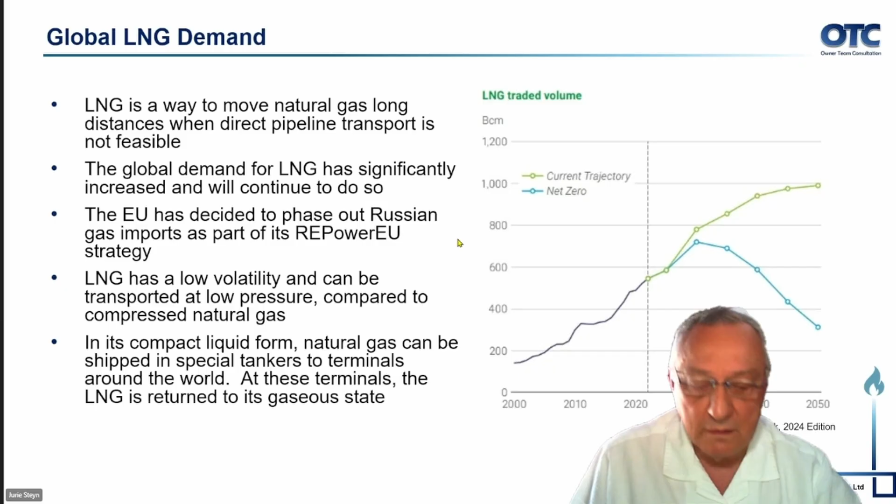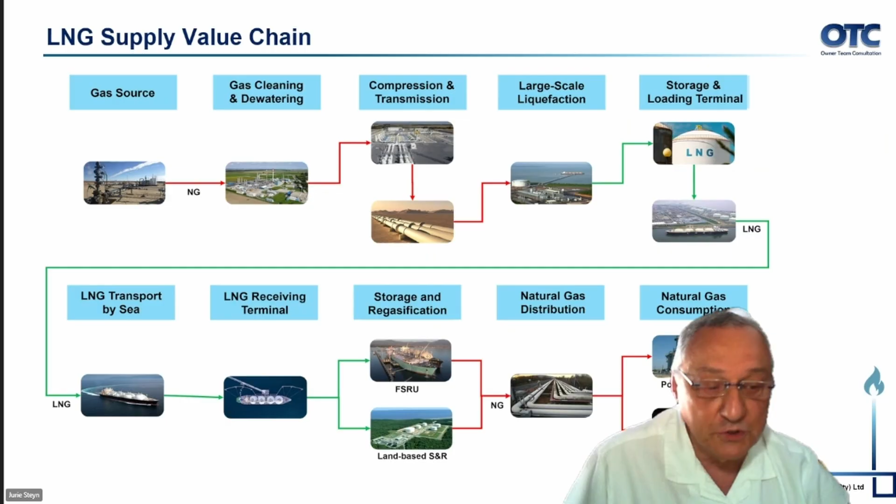What we're going to focus on today is this little section of the network. If I enlarge it somewhat, I'm going to be focusing on the receiving terminal part and the storage and regasification side. The next speaker, Freek van Heerden, will talk more about the distribution side of it.

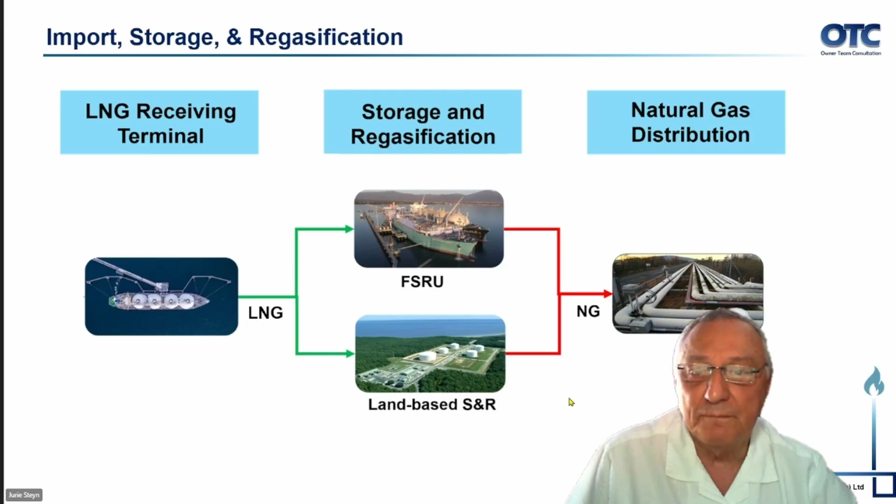If we look at the port and marine infrastructure required, obviously you need deep water berths. You need to be able to accommodate these LNG carriers. Typical capacity is 125,000 to 174,000 cubic meters. There's an example of such a carrier vessel shown from the top.

You need mooring and unloading facilities. This includes things like cryogenic arms or flexible hoses for LNG transfer. And of course, dredging and navigation aids — you have to ensure that large LNG vessels can get into your ports and be able to maneuver safely.

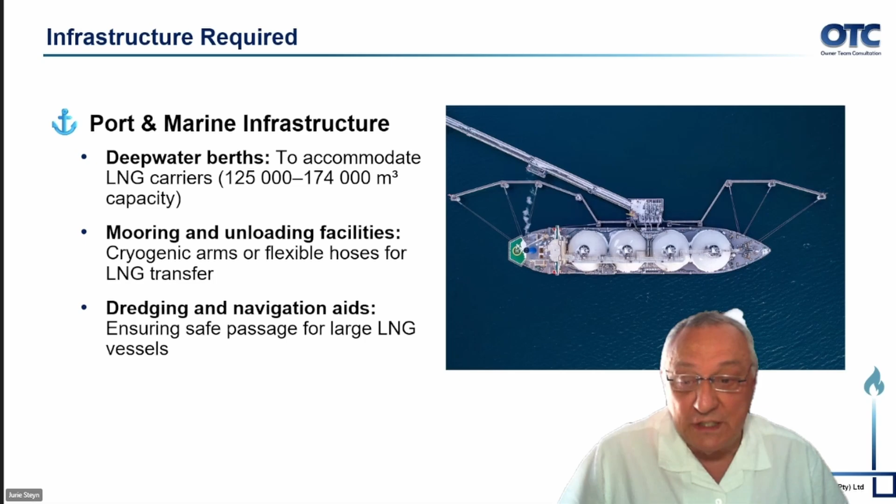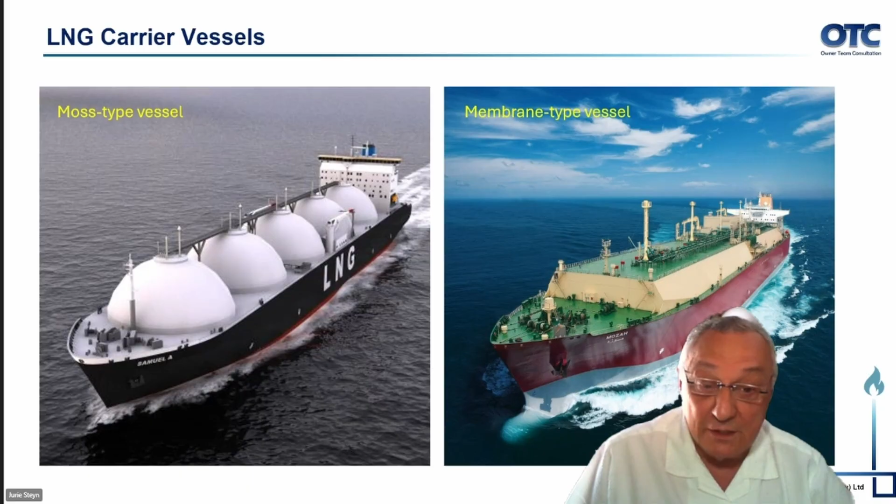Just another example of what these carrier vessels look like. On the left-hand side, there's the original versions, so-called Moss-type vessels. On the right-hand side, I show the membrane-type vessels. They look a lot sleeker, and they are also somewhat safer than the Moss-type vessels.

If we look at the storage and regasification portion, as I indicated, FSRUs, or floating storage and regasification units — these are quick to deploy solutions. They can be used in the ports of Richards Bay and Ngqura.

If we look at the onshore facilities, you would require onshore LNG tanks. These are large cryogenic tanks, up to 220,000 cubic meters, for long-term storage of LNG. And of course, regasification systems are required to convert the LNG back into natural gas as required for projects planned in the area.

In the picture, I show an FSRU. This is the green vessel in front, but if you look closely, there's a black vessel behind it, the one with 4 domes on it. That is a supply vessel. The green one is the storage and regasification unit.

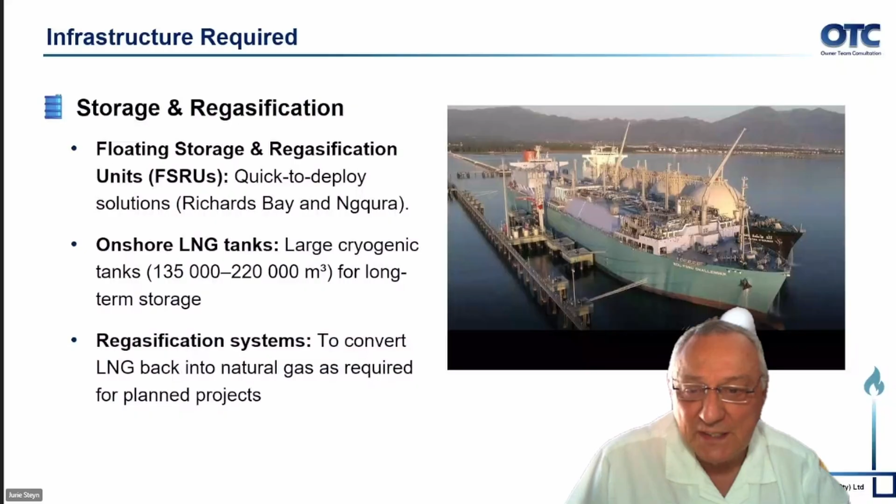This is what an LNG regasification unit looks like. LNG regasification means you have to heat it above its boiling point, which is minus 162 degrees. So you just have to heat it above that, meaning you pump the liquefied natural gas into these vessels, and by heat exchange with the ambient air, the first one, top left, it converts to gas again.

But if that's not sufficient, you can have what is known as a forced air LNG regasifier, or an open rack vaporizer, similar to these upright vessels, but you spray water on top of it. The water gets cooled down in the process and works well if you're at the coast, but there are limits to the cold water temperature you can put back into the ocean if you don't want to harm the sea life.

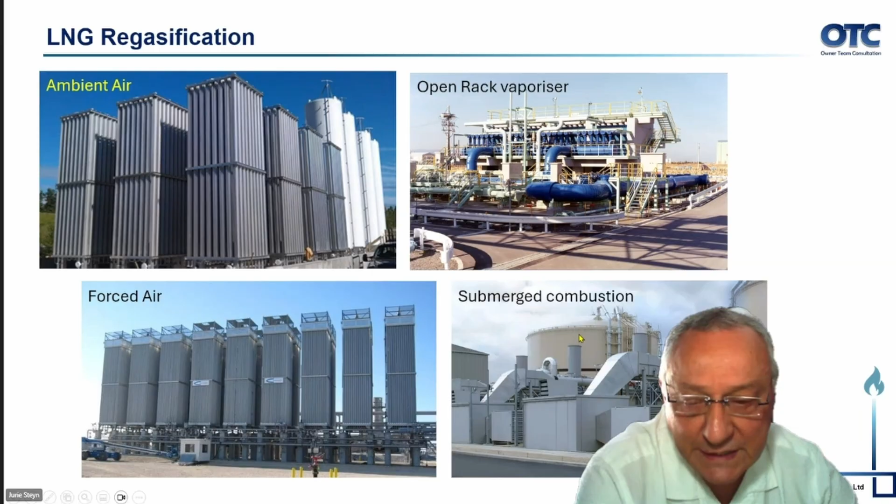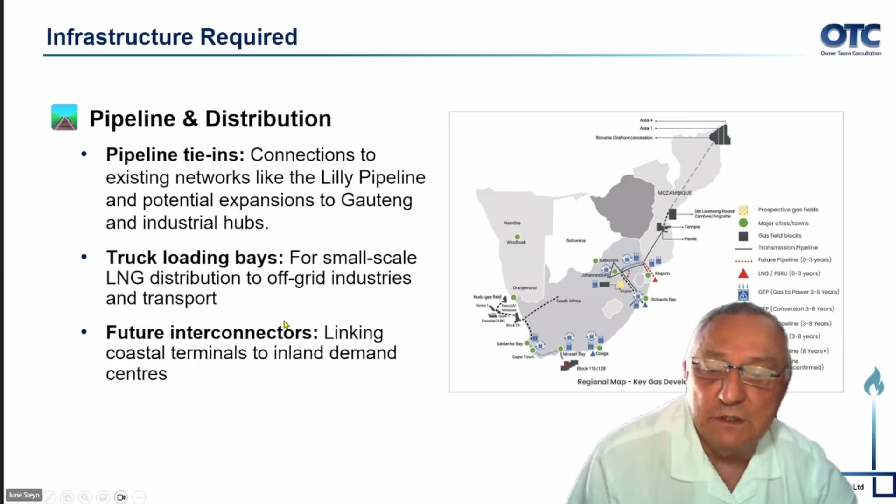Lastly, in terms of infrastructure required: pipelines and distribution. You obviously need pipeline tie-ins, connections to existing networks like the Lilly Pipeline, and potential expansion to Gauteng and industrial hubs. Truck loading bays for transport of LNG — this is small scale, for off-grid industries and for use in transport. And future interconnectors linking coastal terminals with inland demand centers.

Provision must be made for alternative gas supplies to overcome the looming gas cliff in South Africa. So we don't have too much of a choice in this matter, we have to go this route. But we also have to utilize any in-country resources, and these must be developed as fast as practicable to minimize LNG imports.

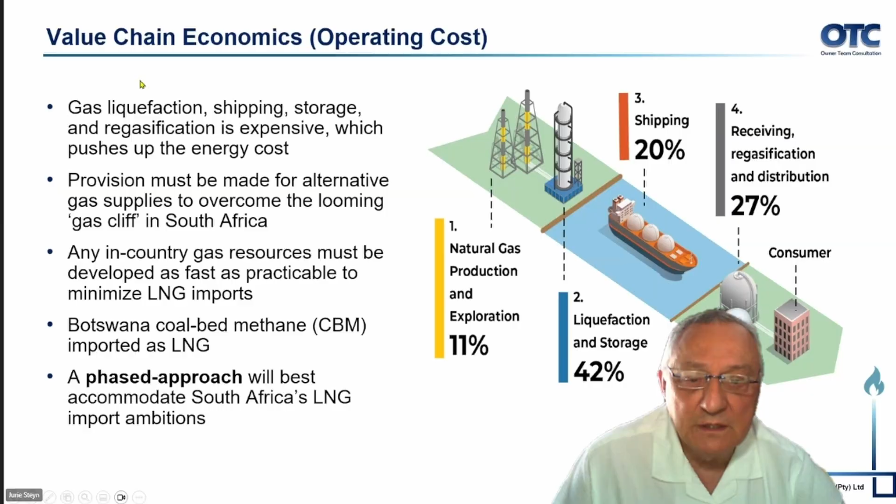If we look at a phased approach, phase one is quick start import capacity, and this can take anything up to 5 years, with the objective of securing immediate LNG supply to bridge the gas shortfall and support gas-to-power projects.

We'd need a floating storage and regasification unit, because these can be manufactured quicker than building on-land facilities, with a primary hub at Richards Bay, and a secondary hub at Ngqura, which is the Xhosa word for Coega, so it's the port at Coega.

Port and marine upgrades, LNG berths with cryogenic unloading arms and dredging for large LNG carriers. Integration of gas-to-power facilities, a 3 gigawatt gas-fired power plant in Richards Bay, tying into the Eskom grid to stabilize supply from there.

And domestic and regional gas supply, developed at maximum speed to reduce imported LNG, and this can be delivered either as compressed natural gas or liquefied natural gas, depending on the distance to the consumer.

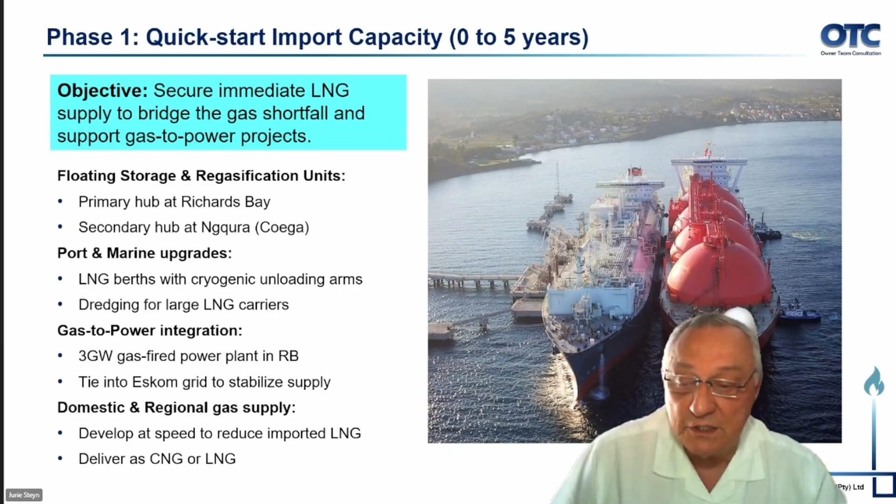Phase 2 is expansion and onshore anchoring. This can take 5 to 10 years from now. The objective is to transition from stopgap FSRUs to permanent infrastructure and expand the inland reach.

Onshore LNG terminals, build several large tanks, install high-capacity vaporizers, develop the pipeline, extend from Richards Bay to Gauteng, interconnect with the Lilly Pipeline. Domestic, same as before, deliver as CNG or LNG, or tie into pipelines once the supply and the quality has been proven sufficiently.

And import LNG from the Botswana coalbed methane fields. Optimize industrial integration, try to anchor the demand in the Richards Bay Industrial Development Zone, and expand LNG use in industry and transport. And the graphic shows what such an inland storage and regasification facility could look like.

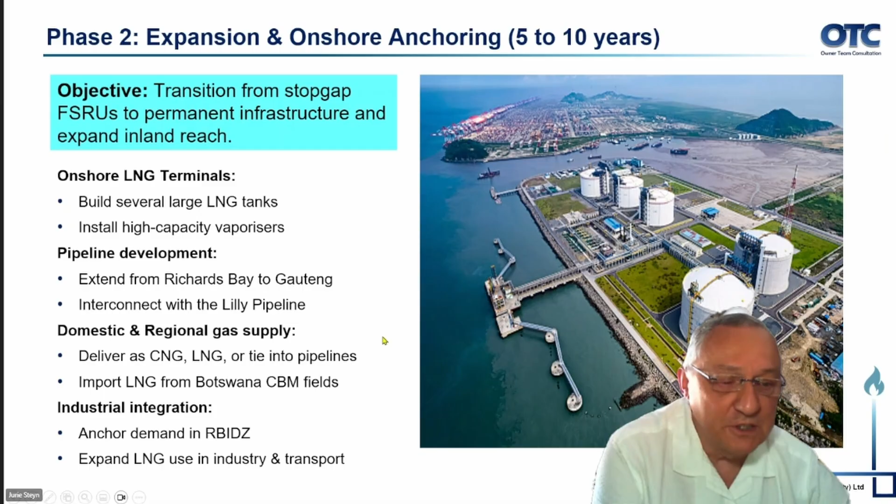Phase 3, now we're talking 10 to 20 years in the future. Regional integration and energy transition, with the objective of positioning South Africa as a regional LNG hub and to align with decarbonization objectives.

This talks about a regional gas grid, interconnecting Botswana, Namibia, Zimbabwe, and Mozambique for cross-border trade in gas, and enabling reverse flow to balance supply and demand in different areas. We have to diversify LNG supply, which means long-term contracts with countries like Qatar or the US Gulf or West Africa. And we have to be able to blend with regional pipeline gas.

Domestic and regional gas supply, and if I say domestic supply, this is the Kinetikos and the Renergens of the world, and whoever else wants to operate in this arena. Maximize local production and include shale gas in future thinking. And again, deliver as compressed natural gas or liquefied natural gas to remote areas, but ideally tie into the pipeline network. And strategic storage, large-scale LNG storage to ensure energy security for the future.

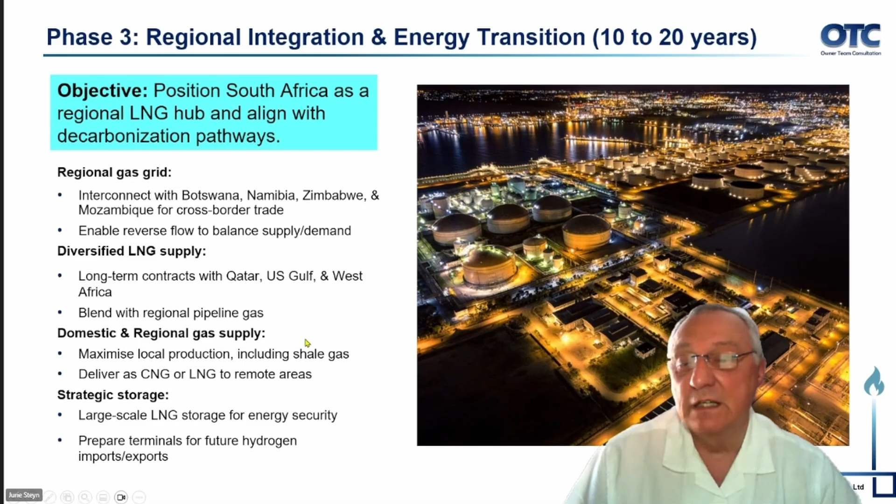Wilmina, that is my story for now. So I go back to you, and I thank the audience for listening.

Thank you, Jurie. Wow, I love those pictures, it just makes the theory so much more real to see it. And I can imagine if you stand there on the harbor and you look at these big ships, you really get an idea of how intense, how much is required to bring it in.

So Jurie has brought gas from international into South Africa via the coast. Now Freek is going to help us see how we're going to distribute it inland. Many of you know Freek very well, he's also presented more than once at the webinars. Freek has more than 40 years experience in process and project engineering on oil and gas projects, not only within South Africa, but globally. His CV lists a few things he specializes in, but I personally think we must rather list the technologies that he does not specialize in. That list will be shorter than the ones that he knows a lot of. But in OTC, he leads the technical team with all these different technologies and all of his experience. And with that, we hand over to Freek, who's going to talk about gas infrastructure reaching the end users.

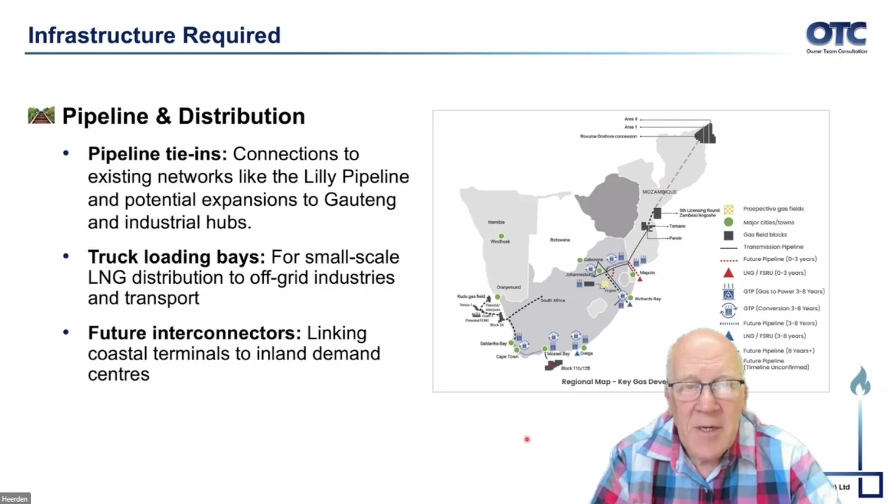If you look at this picture, we always zoom in on this gas network and say, look at this pipe work here in South Africa. When I zoomed out on Google Earth, I thought, it's a very small bit of South Africa that's served by this pipe network. That realization struck me and made me ask, why is it looking only like this?

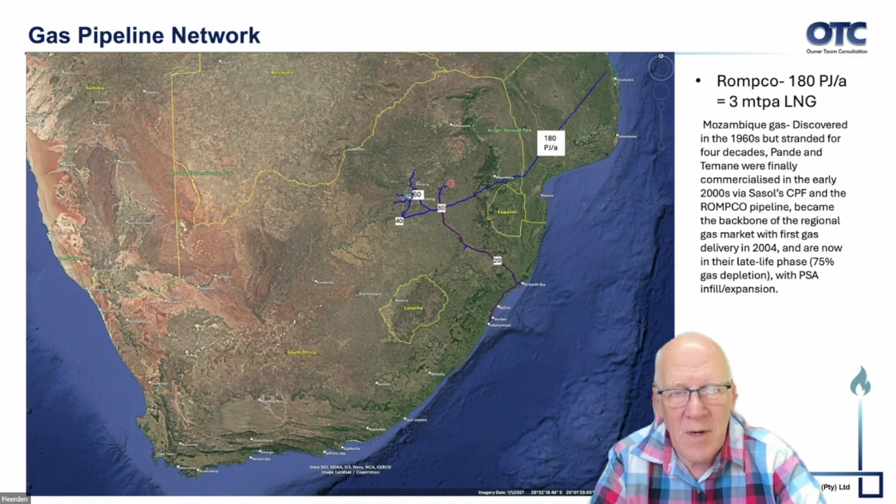Bringing in roughly 180 petajoules from Mozambique. It started at about 100 originally, if I remember correctly, reaching South Africa around 2004. These are the consumptions in the different regions. This line going down to KwaZulu-Natal is methane-rich gas, and there's also the line going to Witbank with some methane-rich gas.

So what can we do now? There's been a number of ideas around where we can bring LNG in. Jurie mentioned some. There's been talk about linking in at Vilankulo, Maputo or Matola, Richards Bay, Ngqura, maybe Mossel Bay, Saldanha. So there are a number of places where you could potentially bring things in.

I'm using the idea that, in the end, we want to produce 20 gigawatts of gas-powered electricity, just as an anchor for discussion. I'm not of the opinion that 3 gigawatts of power in the long term is really enough, for example. So if we say 20 gigawatts of power is what we want, that's roughly 20 million tons of LNG.

This stuff coming in - if we use imported LNG, a lot of these customers cannot really afford it. So I temper that down and say about 100 petajoules a year, or 2 million tons. Import terminals on land would need at least 3 million tons a year. FSRUs, maybe 1.5 million. What are we looking for?

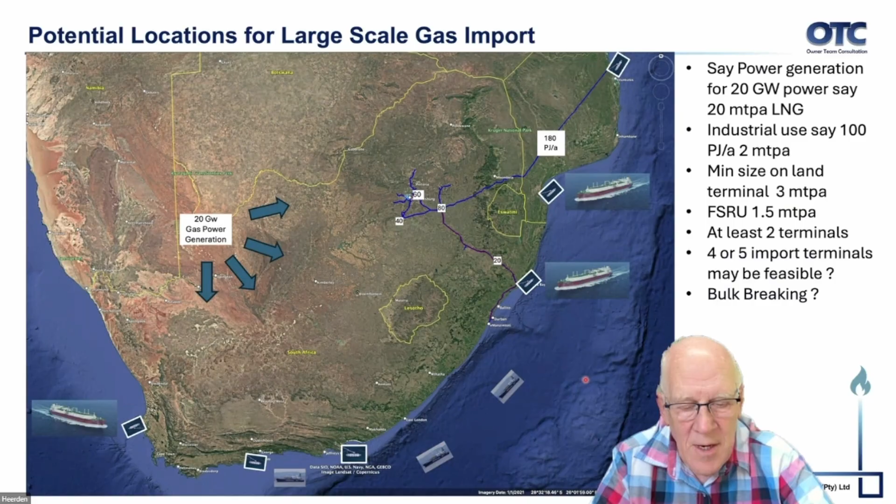The next question is, what do you now do? The LNG now sits at these points. There's been a lot of talk to say you generate power here, and you need an anchor to justify an LNG terminal. So generally people say put up a 3 gigawatt power station here, wherever you do that, but now you must get the power out to the customers. So this is one of the problems.

How do you get the power, especially if you bring LNG in here rather than where most of the power is used? And I put a big cross here - this LNG, I believe, is too expensive for a large number of industrial users. It's definitely too expensive for Sasol and some of the other people here. So it doesn't really help what I call industrial use, the sort of people presently on this grid using power.

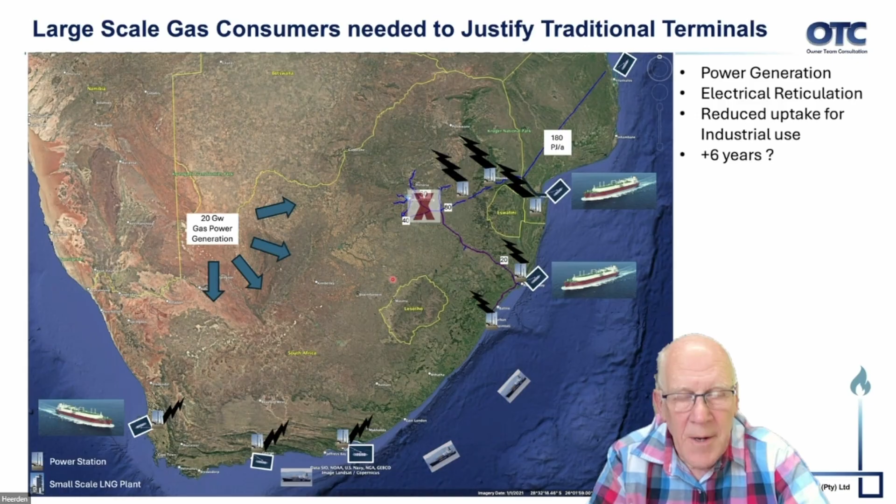So what could be the next step? In the gas plan, they talk about corridors, pipe corridors. One option could be to bring a pipeline around here to get the gas to where you need the power. It's quite interesting that we found it's cheaper to bring gas to a place where power is required, rather than make the electricity somewhere and have long transmission lines. That is quite surprising to me, but it looks like that is better.

So the idea here is that you transport gas around through pipelines and make the power where you need it - so there's local power here. I think there's quite a bit of power required around the Cape Town area and so on.

This could be, let's say, a 6-year exercise perhaps. Maybe I'm not optimistic, but you can actually get gas and LNG in, mainly for power production, is my view. This pipeline is 1,600 kilometers. Estimate you need about 3 gigawatts of electricity offtake along the pipeline to roughly justify it. This sort of 1,200 kilometers - the original Maputo pipeline, as I said, was justified on about 100 petajoule anchor load from Sasol at that stage.

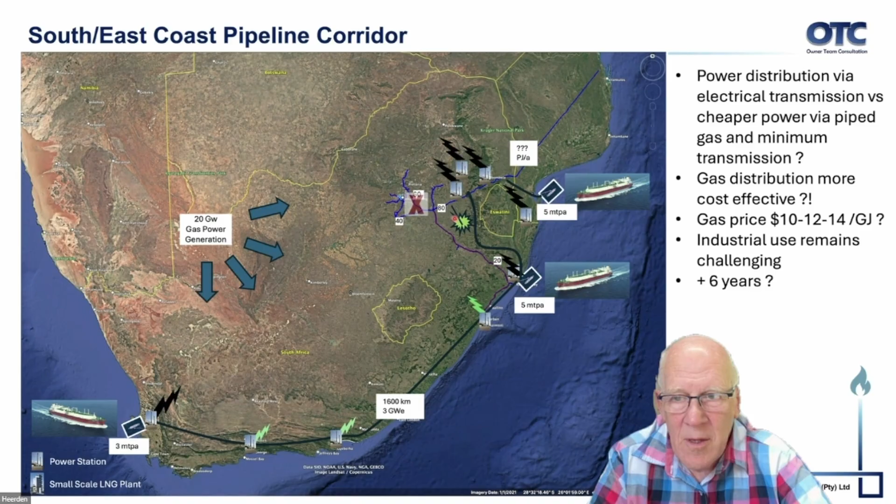So what can we do otherwise then? Let's just look a bit at small-scale LNG. We have spoken quite a few times about these local gas fields. Yuri mentioned them also, so there's reasonable progress in certain areas of starting to produce LNG. I think the Botala one is quite well known. The Kinetiko FFS one is quite well known, that we can produce LNG and bring it to the Joburg area or wherever.

Also small-scale LNG imports - this is a little ship, not a big ship, to either via ISO containers or sort of what we call a ship-to-shore type of operations, where you can offload directly into tankers and cart it around. You could do that at various places along the coast, actually.

These things, or the LNG produced this way, is not necessarily all that cheap because it's quite small scale. It is starting off productions globally and locally. Over time, I think as the operation expands, the LNG will become cheaper, but mainly for fuel replacement or industrial use where people can afford it more than anything else.

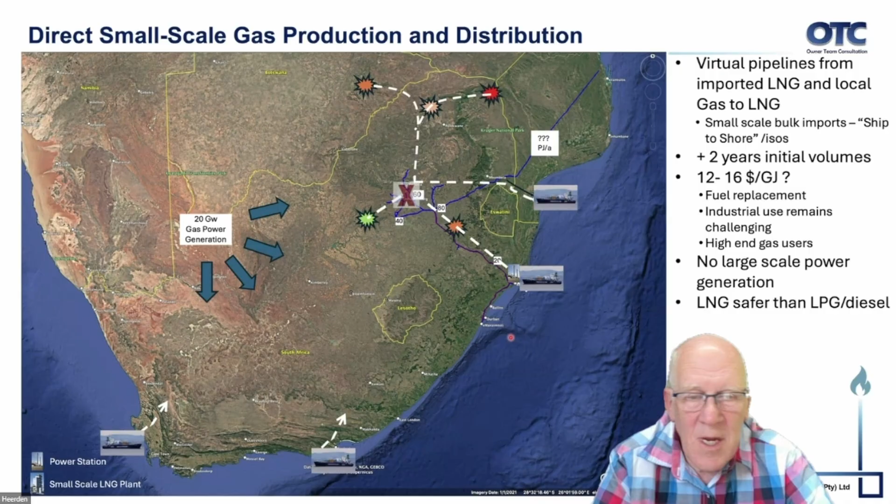There has been quite a reluctance by port authorities and those people to allow LNG ships and things into harbors and so on. The perception is that LNG is extremely dangerous and extremely hazardous, but LPG ships are generally allowed in - there's quite a few LPG import terminals. LNG is actually a lot safer than LPG, it cannot cause things like BLEVEs and so on easily. So there is this misconception, I think, that we have to work on a bit, that it is not a dangerous thing. A lot less accidents on LNG logistics than even diesel or LPG and so forth.

Next step, thing that's been talked about a lot, is bringing gas from either the Namibian side or the South African side here, where those big gas fields are. This pipeline, about 1,200 kilometers, you need about, say, 150 petajoules of gas along this line, but this can be a big line. This gas, I think, can land here at a price that is affordable to the industrial users here and so on. So this really is an excellent way to get affordable gas in at this point here.

You can take the LNG that's produced here in the previous slide, and those things can supply niche LNG markets where you need LNG as LNG, for instance in vehicles, rather than gasify it and put it in for gas users and so on. So there's still a place for all these sort of things, and both options can work.

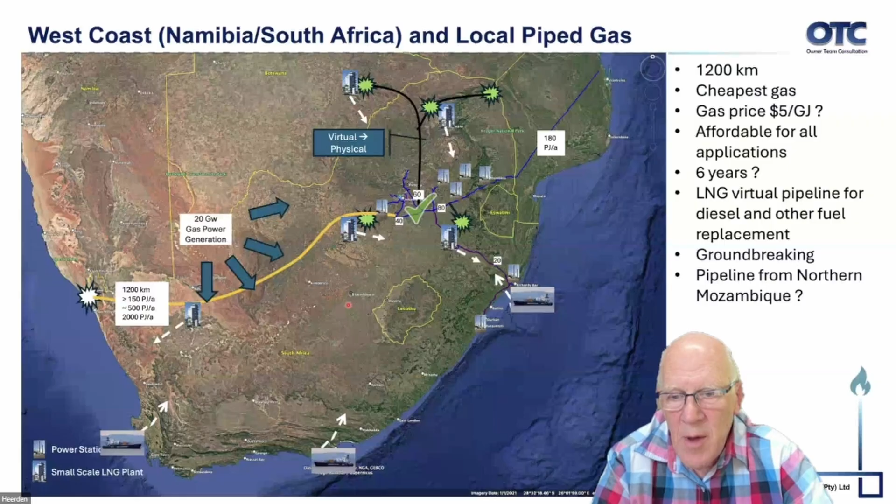I didn't mention too much about the Mozambique pipeline up from Pemba or that area. That's over 2,000 kilometers. It's very quiet about that pipeline. Not sure whether there's much happening - I don't think we could find anything at the moment on that. So now we have that option. You could actually bring a pipeline along here in this option to bring gas to the coast in this area.

Now, what could it look like in 15 years or so? It's just my sort of, as I said, visualization. If we can get gas in, affordable gas, that's a great solution. In the end, it will be a mix of things, where some LNG imports, some pipeline gas, local production - the demand is very big, and we actually in previous presentations spoke about that and the amount of gas we think can be taken up at lower prices and so on. So a complementary solution.

Unfortunately, at the moment, quite a bit of the people in this thing see it as a competitive thing, where one supplier or one area wants to compete with another area. It's not - the market is big enough, and I think there is more than enough space for everybody to work together and help us achieve anything that's really viable for the country.

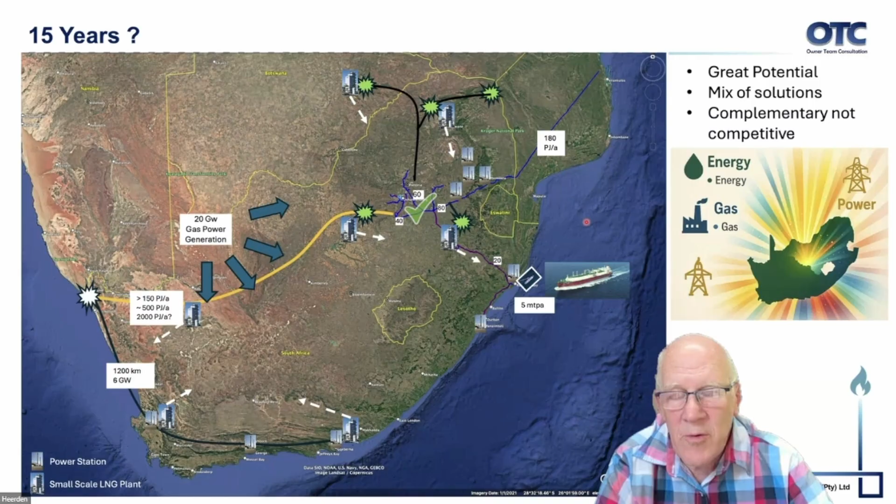So how did this happen? Focus on import terminals. Remember, India has a lot of coal and so on, but they started focusing on the gas area quite a bit of time ago.

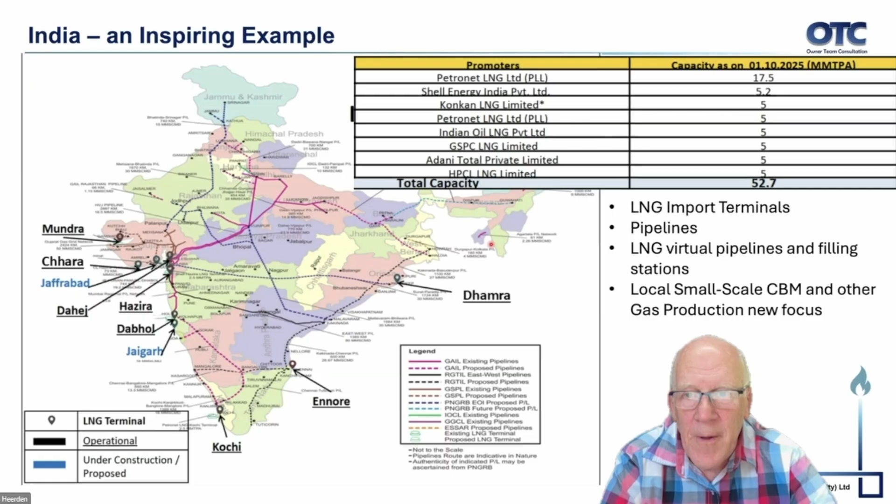I just thought this is a very nice, interesting way that it happened. That could be a bit of an example. We have a lot of resources in our pocket here. I just put this on as a thing to say, there are lots of dots and flames and things here. Let us put shoulder to the wheel and see if we cannot do this. It's here, it's in our hands. We must just achieve it.

And that's where I end.

Thanks, Wilmien. Thank you, Freek. Freek, you made my job very difficult. Every time I want to type a question for you, the next 2 minutes you've answered that question. So I want to challenge our audience. I hope you have questions for Freek that he has not answered yet during his presentation. Did you see that Freek talked about groundbreaking ideas and work that we need?

But we need to break a lot of ground to be able to lay so many pipelines in South Africa. But yes, let's take that advice. Let's put our shoulder next to the wheel and start breaking the ground to be able to transport the LNG to wherever we need it and to make South Africa grow and industries grow. It will be good for each and every person in our country.

Our third, but not least, presentation for today will be from our external presenter, Stephen Rothman. Stephen has a strong foundation in strategic management, and he has successfully developed businesses from greenfield projects to mature ones. Really a skill that I take my hat off to. I don't have any idea how one does that. But for the past 16 years, he's specialized in the gas sector, playing a pivotal role in bringing global technologies into Africa. His work has been instrumental in introducing and expanding these technologies within the sub-Saharan Africa region.

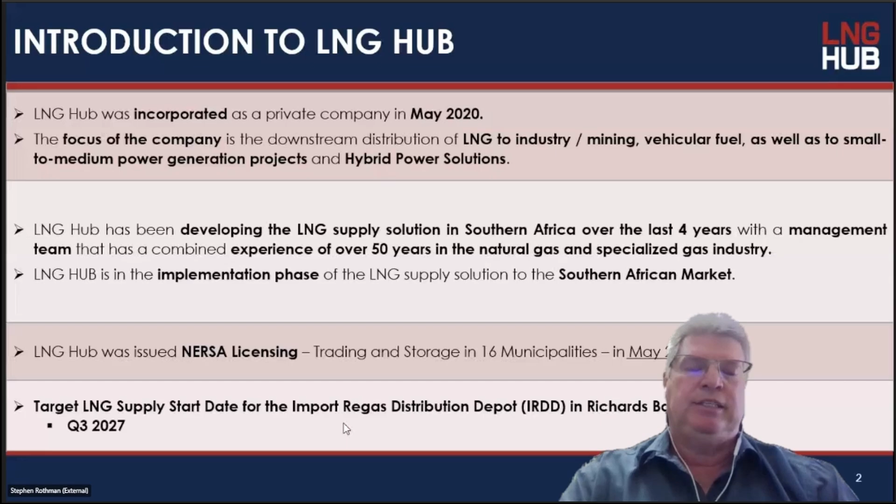How can we enter the market focusing on the downstream distribution end? We managed to get our NERSA licensing in May 2022, and we narrowed down our focus to Richards Bay itself, July 2027 first supply. Now, the business evolved. We set it up having in mind we will then buy LNG from our neighbors. We will do downstream distribution, and we are looking at a fuel alternative. We're not looking at substituting the Sasol pipeline, and I'll show you now where we're looking at fitting into the supply chain.

What we found as well is going into this market, we found a lot of people wanting information, and we went into a lot of consulting work where we provided solutions. We looked at certain projects using waste gas, supplementing with LNG supply. We then said, what we need to look at is not just the small scale, but how do we offer an overall solution to companies? We also started introducing LPG mix, not our specialty, but we're contracting that out to direct suppliers.

The aim with that is specifically where we're looking at setting up companies, for example in the Cape region, with a focus on when we structure and set up an alternative for paraffin, we would be ready then to switch that company to LNG in about 3 to 5 years' time.

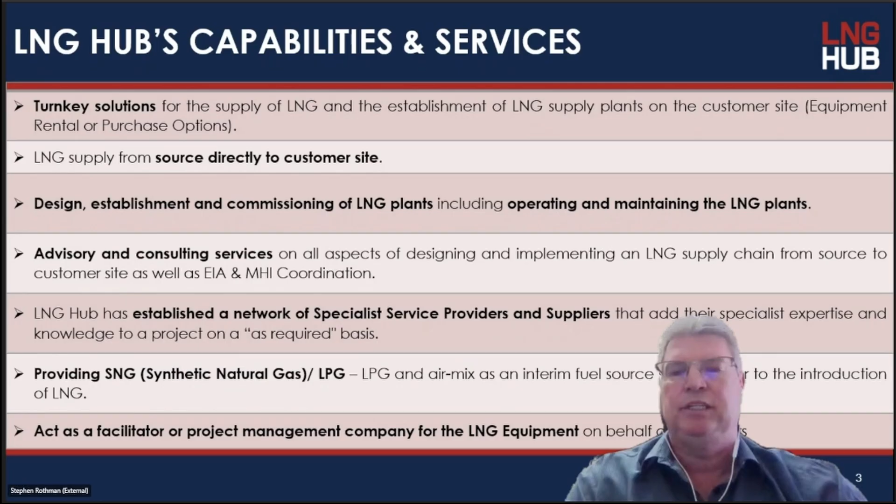Once the terminals are operational, we would source through the terminals and create depots, pretty much like your diesel infrastructure, where we're looking at 24/7 distribution. We opted to choose sites, the first site out of the port area.

The reason is we can then deliver 24/7. We don't have the congestion in and out of the port, and we're able to give our customers buffer storage. Also, we know the ports have a lot of labor issues at certain times of the year.

So we built in buffers to be able to carry stock for at least 2 weeks, and at the customer site we've also allowed for a week. So we built in buffers to make sure that we can supply.

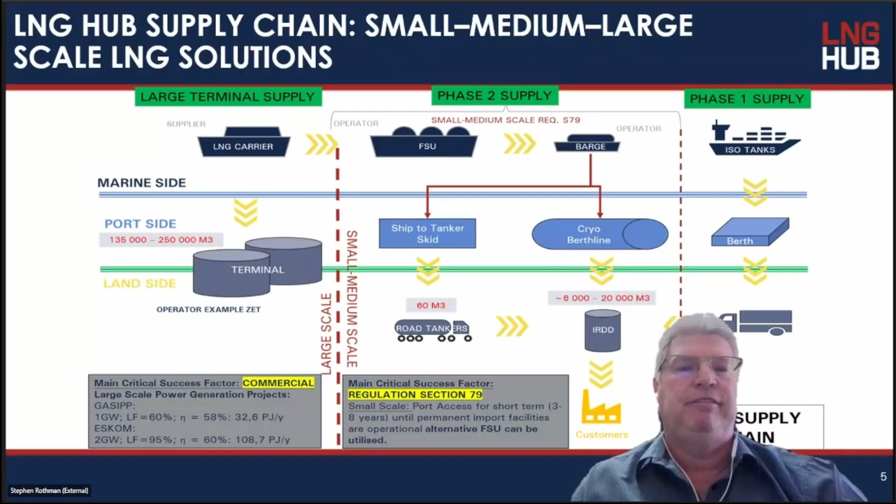So the markets we've been focusing on, as we've spoken about previously, is we are looking at hybrid power solutions. A lot of mining companies we've been working with on that.

Industrial, straightforward supply - alternative to paraffin, diesel, heavy fuel oil - but also limited focus, why we call it import regas distribution, because certain customers in Richards Bay will look at direct supply via pipeline once there is no gas available. So we have allowed for that.

And then with Puma Energy, we've got a long-term project where we're launching a pilot phase in July next year to develop filling stations.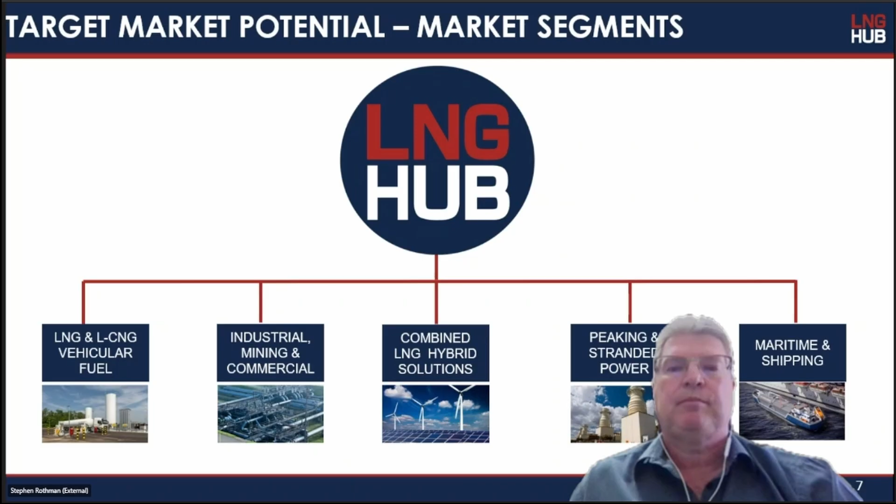Giving you a bit more background on what the import regas distribution depot facility looks like. We've secured land at, and I think most of the audience will be aware of it, the Bayside Smelter.

We would be looking, if you look on the right-hand side there, initially using Transnet's multi-purpose berth, and then once Grindrod has developed this - they estimate end 2027 - we would move the vessels coming into there. We then would be rotating the ISOs every 15 to 18 days.

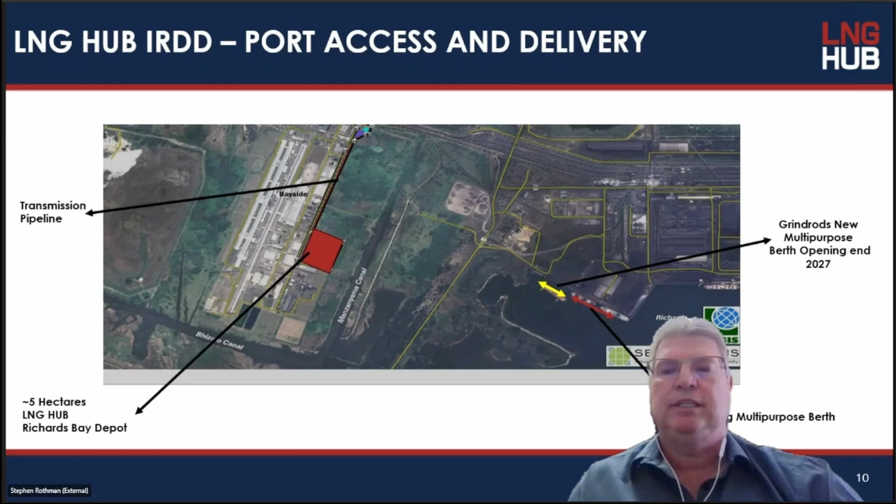And our process, we're looking at the site of the depot where we're regassing into the pipeline, and we're also looking at distribution via loading gantries to customers that have storage on site.

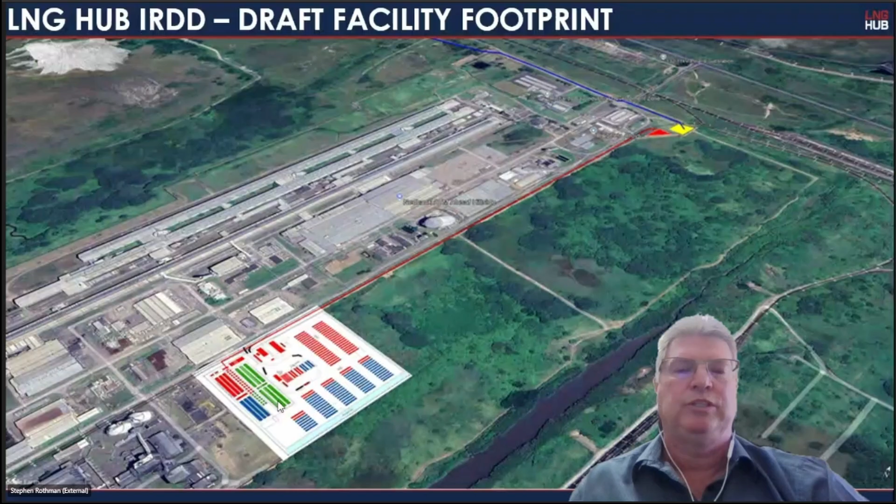So it's just an illustration. Your ISOs would come in, pumped over to storage. We'd have about 18 days to clear out our ISOs. We would then look at vaporizing into the pipeline, also pumping back into our loading gantries and loading our tankers at the facility and distributing to customers.

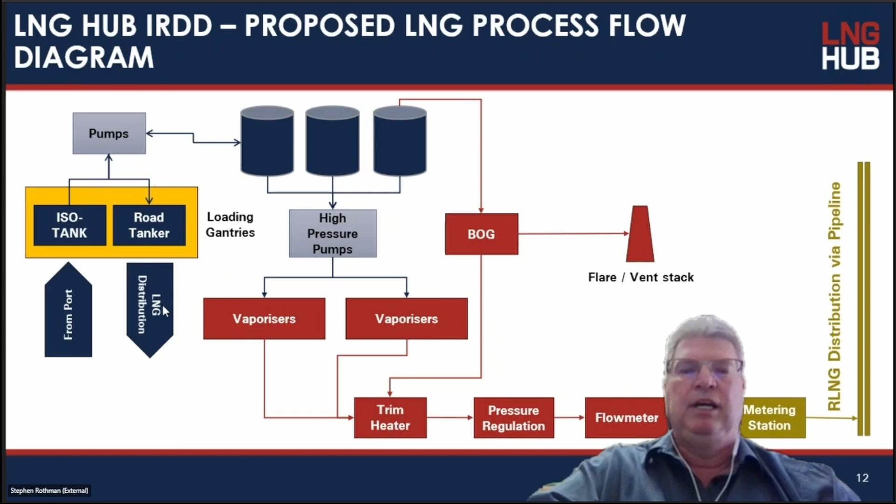That's what a typical customer would look like, a smaller type of customer with a 60 or 80 cubic meter tank. The tanker would come in, pump the LNG across, they would have vaporizers, and we would then supply the gas to the customers.

We've done quite a few projects and proposals. On the left top, illustrating a facility with a footprint of 3,000 square meters, 1.6 petajoules, storage capacity about 1,750. We've done a lot of modeling, got a lot of term sheets, and we're now moving, once our EIAs are completed, expected to be announced on the 12th of December. If we follow the EIA timelines, then we would go through to gas offtake agreements with potential offtakers.

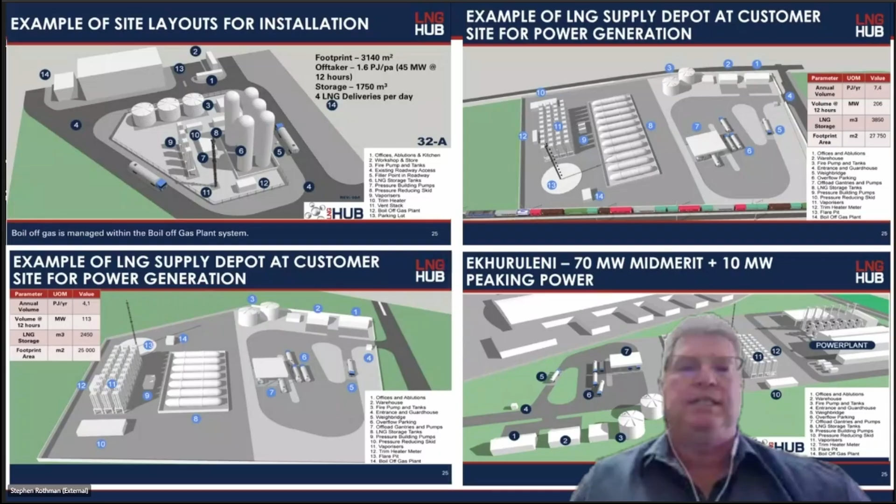The involvement of our facility is where small scale comes in, and you can even go smaller, for example commercial centers or offices. You start looking at rigid trucks distributing from your depot and topping up smaller filling facilities, and suddenly you can compete where traditionally you'd need a 25,000 gigajoules plus a month customer. Now you can start looking at customers using about 2,000 gigajoules a month equivalent.

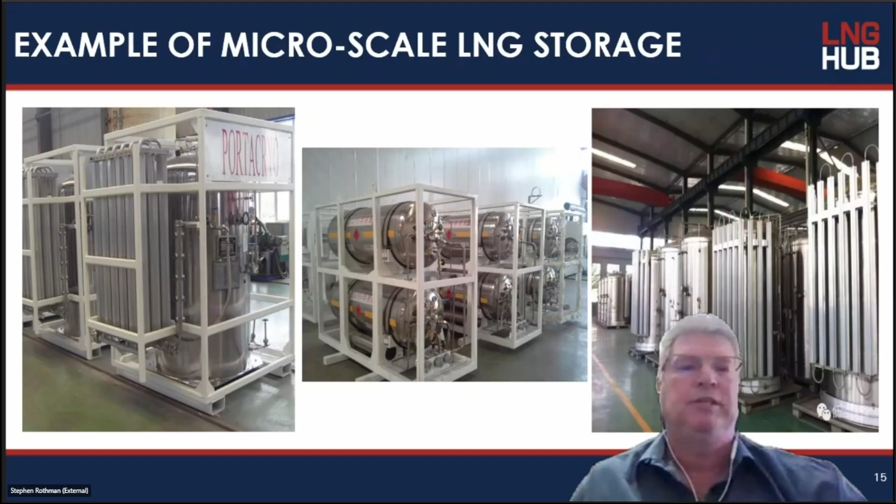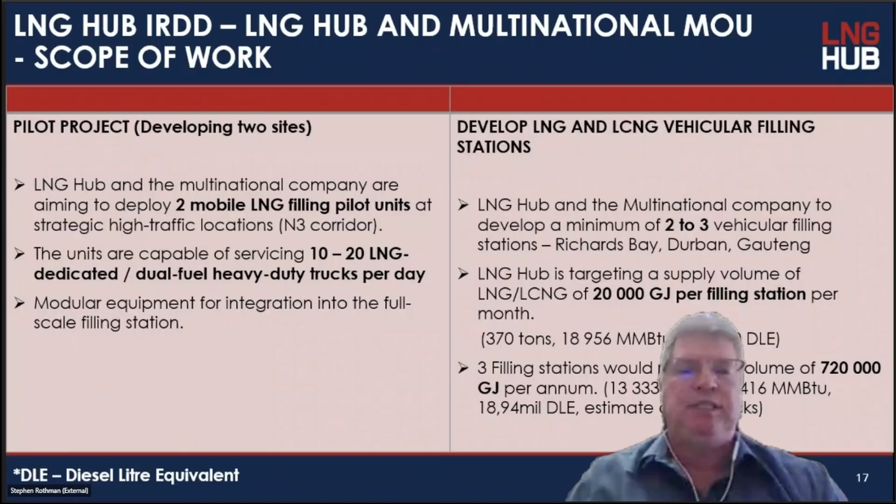Giving a bit more on our filling station strategy: as I said, the pilot project is looking at 2 stations, one just outside of Gauteng, one between Pietermaritzburg and Pinetown, starting off with approximately 10 trucks, going up to 20 trucks, running them for 6 months, and then designing the filling station so it has the capability of servicing up to 600 trucks a day.

The corridors we're looking at to complement our facility in Richards Bay are the N2 going down to Richards Bay, so your coal and mining trucks running down to Richards Bay itself, and then obviously the N3 corridor.

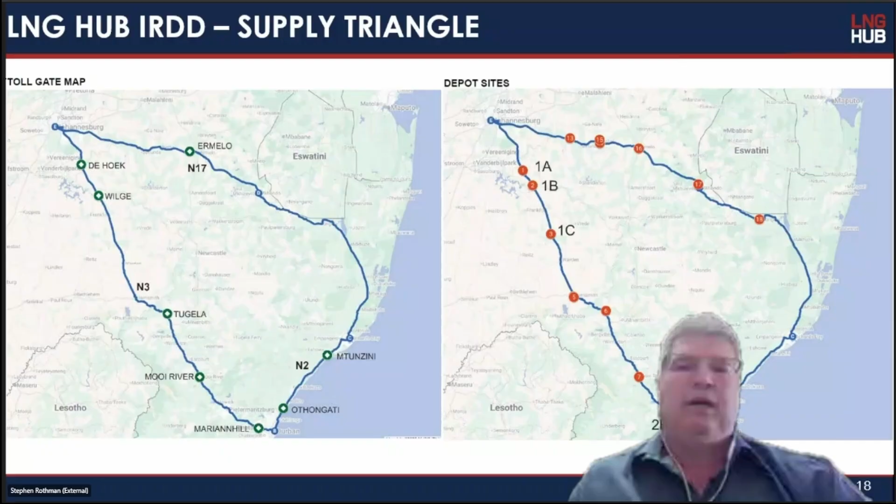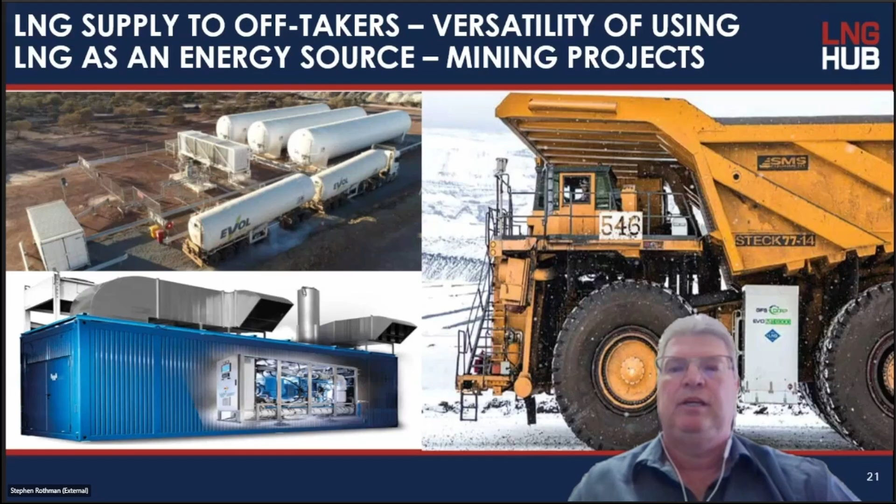Wilmien, back to you. Wow, Stephen, thank you. You guys are really putting your money where your mouth is now, seeing a problem, seeing a need out there and starting to do it. I live exactly between Pietermaritzburg and Pinetown, as you said, and since Koos previously talked about an N3 project, every time I go close to the highway I look at everything with different eyes. So I'm very expectant to see your LNG refueling hub that you're going to put up there.